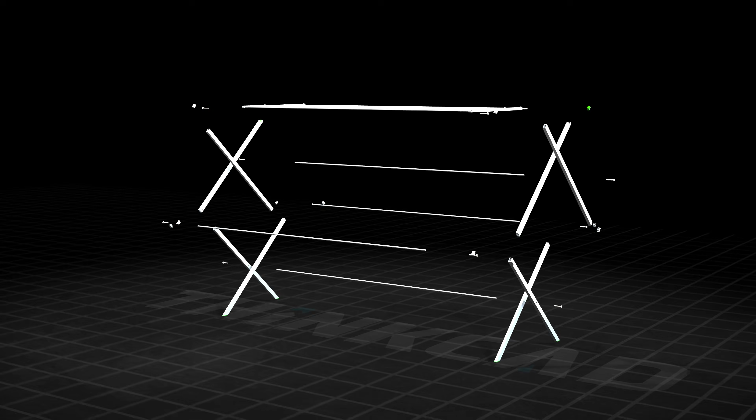Have you ever had an idea and wanted to make it real? In this video, I'm taking this rack, break it down, design it part by part, and turn each part into a technical drawing that any mechanical engineer can manufacture.

Throughout this video, I will be talking about the reasons behind my choice of feature and choice of technique, why I use a feature the way I do it, why I design a part the way I do it. I want to prepare you to start learning a little bit about DFM, Design for Manufacturing. So it's not gonna be your typical SolidWorks video where I say, go to this menu and click here.

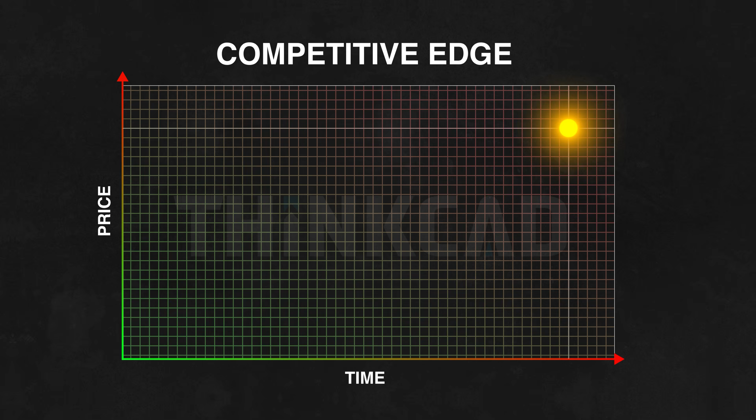You'd want to reduce cost and shorten lead time to stay competitive, because the cheaper your product, the stronger your competitive edge. The way I'm planning to do that is by going after standard components, basically off-the-shelf parts, something I can buy from a website, a production line, or a manufacturer that can already provide it.

So instead of extruding a rectangle, I will go here and I would draw a line. Now I would go to members inside the weldment tab, and I would use the 0.63 by 0.38, which gives me the profile I want. That's an off-the-shelf product, and I don't need to make sure if this component exists or look for someone that can manufacture this. So first step, I would need 3 holes on this member.

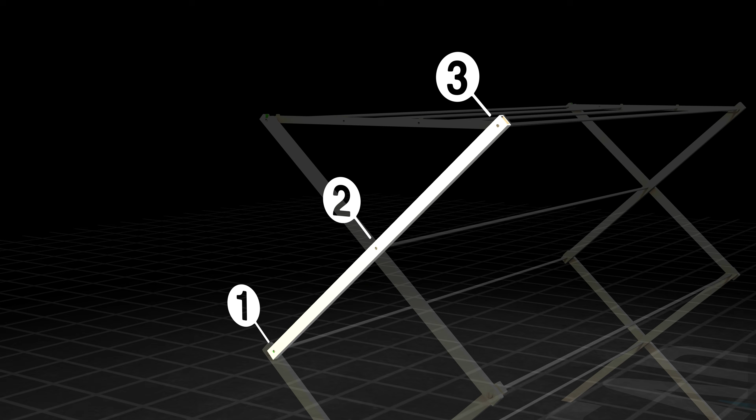Each of these holes has a function. They act as a hinge once the part is duplicated and connected to each other. I also need to consider their size and location. Obviously, it hinges on both ends and also at the center here. But what's the actual size of the hole? What passes through them? How big should they be? These are the things I'm considering at this point.

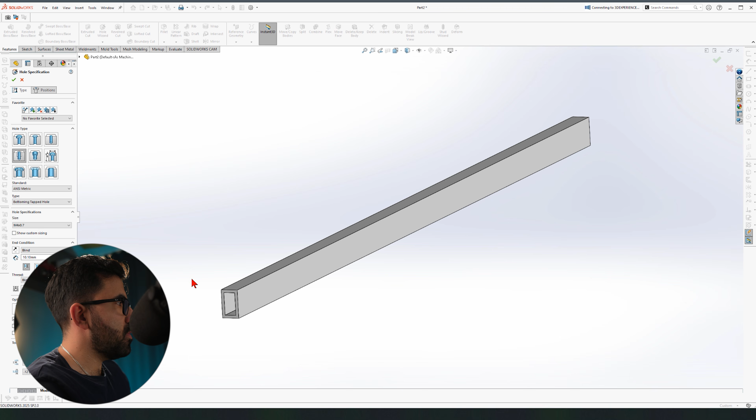So next, I'm going to create 3 holes here. I will use Hole Wizard, and these holes should be large enough to accommodate an M4 screw. I will tell you why. Since I'm going to have the M4s move around in it rather easily, I need to activate the custom sizing and change that to 4.1. Now I can save this.

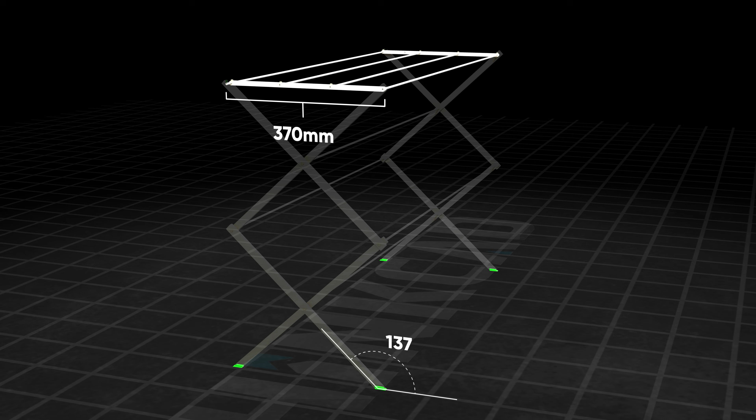Now at this point, several variables are still unknown to us, such as the size of the top rack or the angle of the feet. For example, if I wanted the final rack to stand at this height, the top rack would shrink and the feet angle would be angle X. But if I wanted it shorter or with a larger top area, I'd have to reduce the height, which would also change the cut angle of the feet member. So at this point, I'd prefer to already start my assembly so I can better visualize the issue.

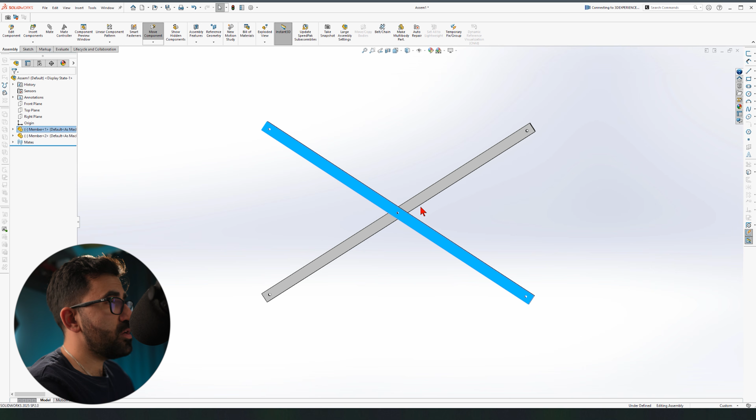Now I need to go and create my mechanism, which is the accordion effect. Now I need 2 of these, so let's duplicate one by holding the control key on the keyboard and dragging one here. If I put this circle on this one and make them coincident, I kind of create that mechanism. But the first component you insert inside the assembly in SolidWorks will be fixed. Now I could right click here and have it float, but then it would be absolutely free with all the degrees of freedom inside this space, which is not what I want.

So what I want is for them to be in one place and work symmetric. Therefore, I'm going to use the top plane and have it mated with this surface, so at least I prevent them from going back and forth along the y-axis. If you look at it, I cannot go back and forth, only up and down. But now I'm going to have to kill that too.

So let's find the plane, this one, and let's have the axis shown. So this tiny axis here, I'm going to pick it, hold the control key down, and mate it with this one. If I do that, then it would move here, but it would probably only go up and down, which is the last thing I'm gonna have to fix.

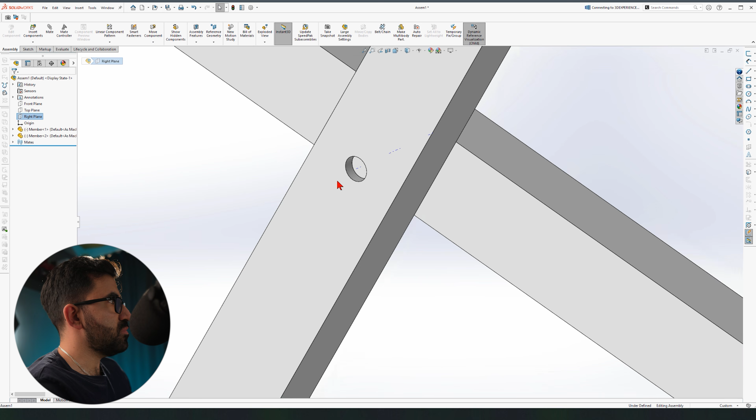So I would probably hold this one and this one too and make them coincident, but they are not moving symmetrically. That's not what I want. I want them to move symmetric according to this plane. So I would select that plane, go to mate, go to advanced mate, pick symmetric, and let's pick this and this. Now, I think we're set.

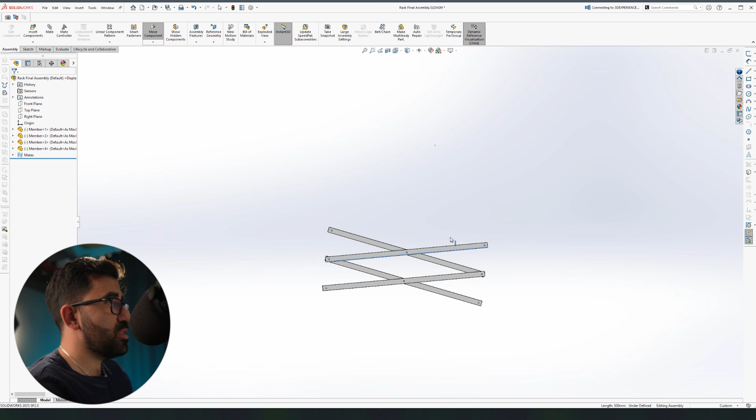This is the accordion effect that we wanted. However, I need another set of these, so I can just duplicate this up. And if I put this one on this one, I have taken care of the first set of my members. That fast and that easy. Done. Now, the next part I want to work on are the shafts that connect these together.

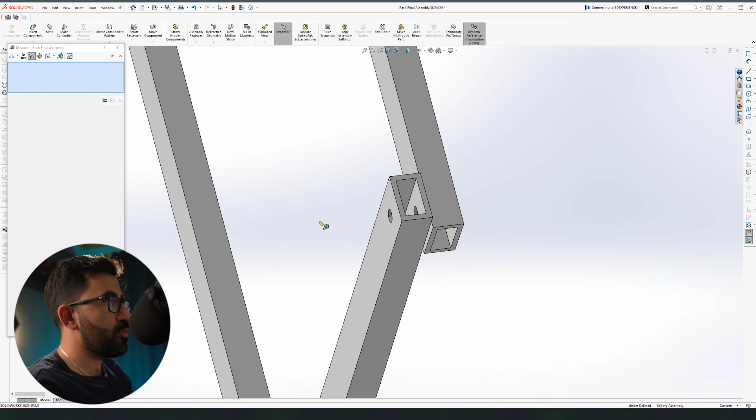So I need another set of members on the other side, but in between, I'm going to have to create shafts. So over here, I have created the holes with a diameter of 4.1 millimeter. Now, the shaft ideally has to go through this. So if the shaft is 4 millimeter, it's fine. I could do that, and in fact, I will do that quickly for you just before I change it and tell you why I cannot do that.

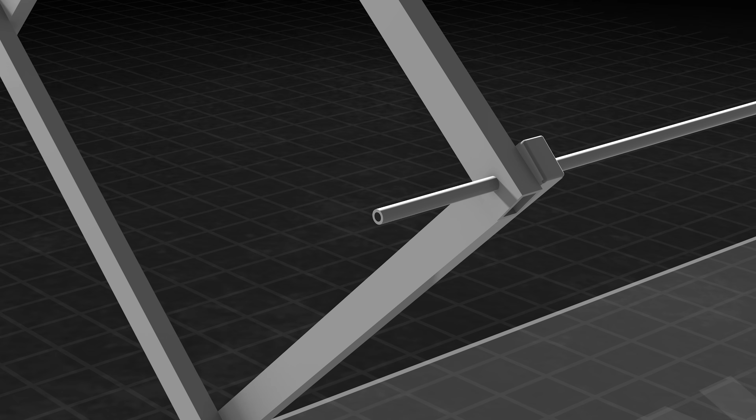So first thing first, if I wanted to create a shaft with a diameter of 4 and wall thickness of 1, this is a shaft that we probably can find in the market. It's standard size, but if I do it like this and say, okay, you two stay here, it would look okay, right? There is a hinge, the shaft goes here, but what would stop this member and this member from moving to the right? There is no shoulder here, there is no stop here, so there is nothing preventing this. Even if we screw something at the end, we would just prevent it from going outside, not inward.

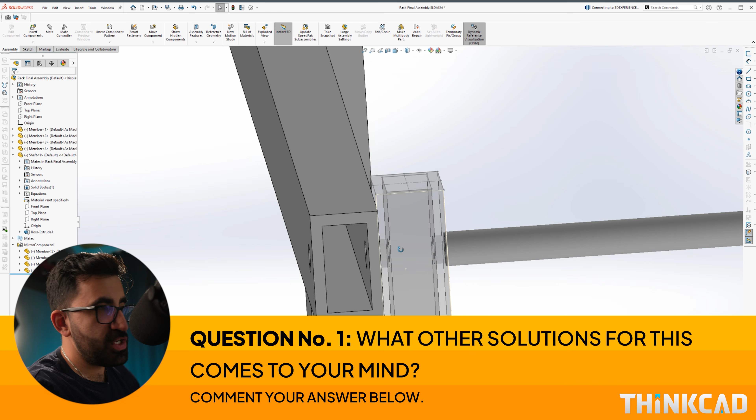Therefore, instead, have this one fixed here, and the diameter should also be bigger. So because the hole is 4.1, I want to look for a shaft which is maybe 5. Why? Because I want it to be larger than the hole that I have. So the shaft is now acting both as a shoulder and the shaft at the same time. But how do I connect this shaft to this side?

I just go here and go for the most common standard mechanical component, a bolt. We put a bolt here, which is M4 on default. We just increase its length to 25, so it can go inside the shaft. And we click OK. But if I do this, I would run the risk of tightening this screw too tight, so this member and this member won't be able to move easily anymore. If you assemble this and make it too tight, you lock your mechanism. So how do I prevent that?

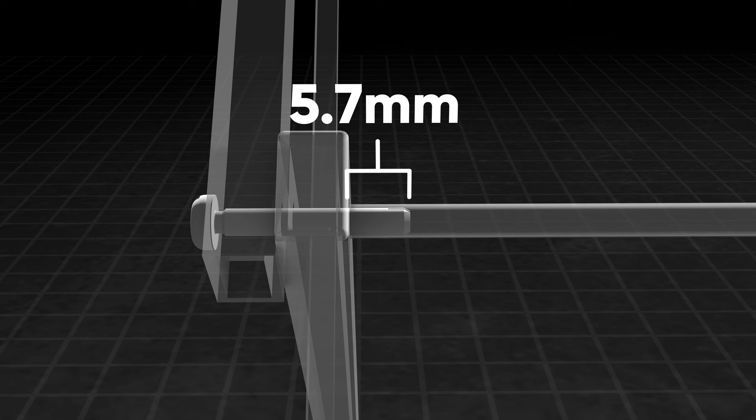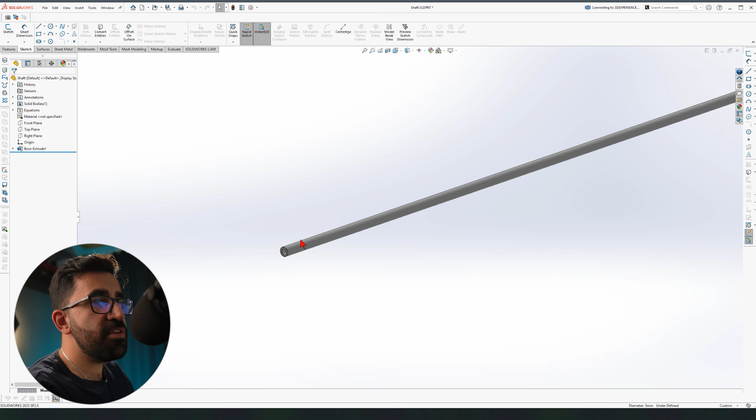So I would come here and insert an inner thread inside this shaft, and I will calculate the depth of this inner thread. By the time the screw is inside the shaft all the way, I will leave a 0.2 millimeter gap here, so there is no locking. But how do I do this? First thing first, I would hide one of the members and I would just measure the depth from this surface all the way to the bottom of the screw, which is 5.7. So if I add an inner thread inside my shaft, which is only 5.5 millimeter in depth, then I think I have created that gap that I wanted.

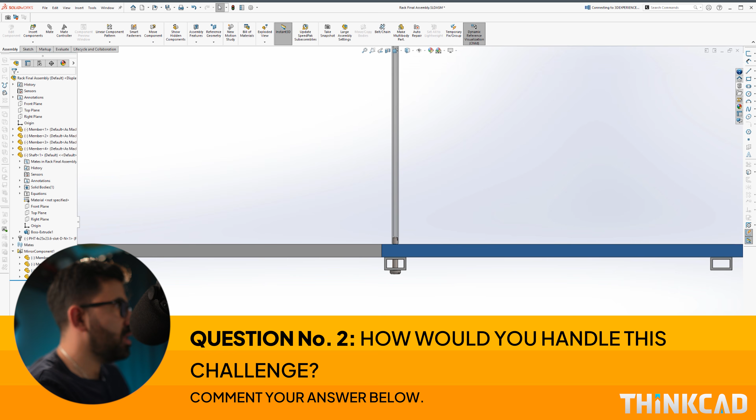But since this is only for the drawing, I would add the cosmetic thread. So we go here and find the M4, not up to next, 5.5. So let's go back and show the mates that hold the screw in place. Let's remove that so we can move this out. We said we want this surface to this surface to be at a distance of 5.5 millimeters. And when I do that, I would hope to leave a gap of 0.2 millimeters here, which I am seeing successfully. Where is it? Over here. This is the gap. Let's calculate it one more time. It should be 0.2.

It is 0.2, so if I tighten the screw too hard, I still wouldn't lock my mechanism. That's another thing to consider. Now my screw also works as a hinge, but the other problem is the shaft is extruded blindly. I cannot take advantage of having a mid plane here to mirror these members to the other side. There is no mid plane here.

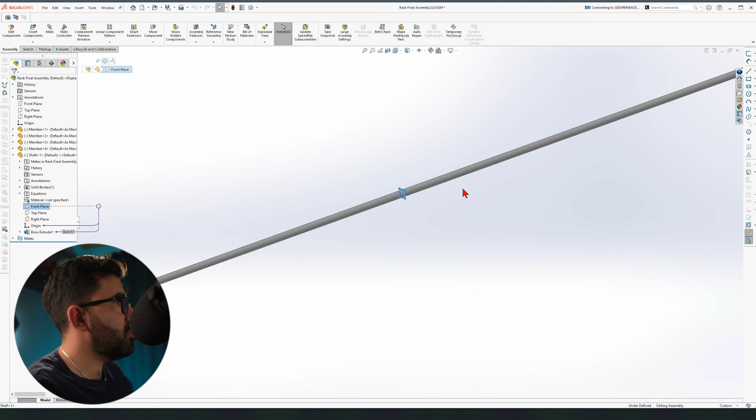That's why I would go back and edit the way I extruded this feature, changing it to mid plane. Always do mid plane, guys. If you're starting off with SolidWorks, if you're a fresh engineer, SolidWorks helps you. Go with mid plane, that's my recommendation. Because if I go with mid plane and open my shaft, I'll see the front plane is here, and I can use this front plane to mirror all these components to the other side. Done. If I did it the way I did it the first time, I could not have done this.

Then I would have had to go create a custom plane, and you don't want to do that. Instead, what you really want is to let these modeling habits sink into your head until they become second nature. It's not about memorizing tools or tricks, it's about building a way of thinking, so when you're in front of SolidWorks, things just flow.

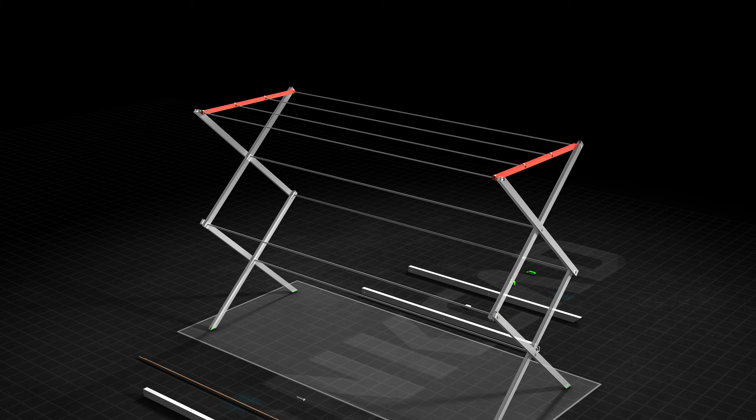Since this is a symmetric design, all I have to do is mirror some of the components—some of the shafts—from one side to the other. And by some of, I mean one. This is the top rack, which we have to introduce here. On one side, it has to go inside these two holes and act as a hinge. On the other side, it has to be folded and also sit on top here and get locked.

So how do I do this? First, let's measure the rough distance between this hole and this one at this stage. This is about 339, so let's go for 350, okay?

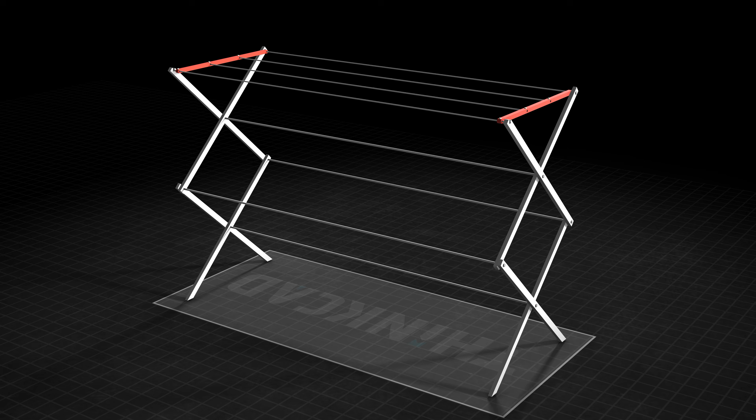But since we need a set of components assembled together to work as a group inside the main assembly, we first need to create a sub-assembly for the top rack parts. That way, we can bring everything pre-assembled into the main assembly. The first component is drawn, then extruded.

Then the circles are added. Now the question is, do we want each hole large enough to fully accommodate the shafts, or do we want the holes smaller like the members, so the shafts rest on the inner surface?

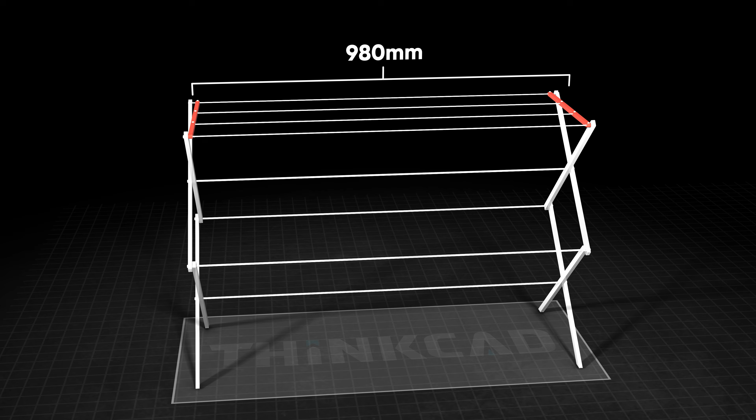To answer this, we look at the rack assembly from the top. If this sub-assembly sits between the inner members, then this distance equals the shaft length. But if it sits between the outer members, that would be a different length. We choose the inner one. That means our side components must sit on the inside, so the shafts must fit inside these components. Therefore, the diameters need to be slightly larger than 5 millimeters, say 5.1, to accommodate the shafts.

So now let's design this side component. At this point, I'm going to create a sub-assembly. Starting with the first side component, I draw a center slot. This center slot will accommodate, let's say, 3 to 4 shafts. So I have the length, and I draw a circle to accommodate the shaft on one end.

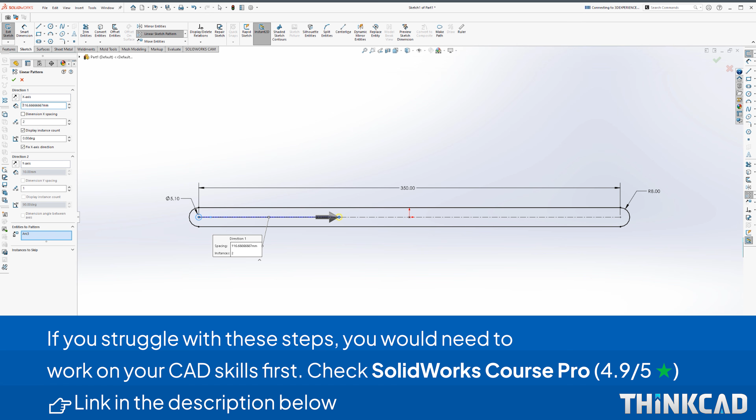Since the shaft is 5 millimeters in diameter and we want to fit it inside this, 5.1, let's use linear pattern to create 4 of them, dragging the last circle to the last point to make it fully defined. Now I can just go ahead and extrude this, let's say for 10—mid plane is fine.

I now create the first assembly, a new one, because I'm going to use this assembly as a sub-assembly in the main one. So I just bring the shaft and fix it inside here. Done. Now I need 4 more.

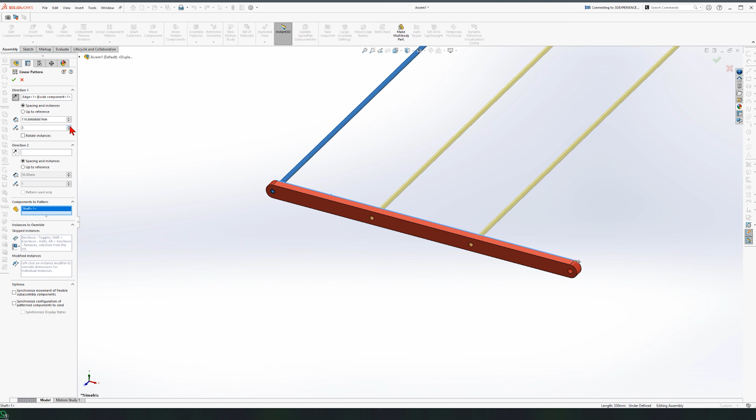I can use linear pattern in assembly mode, picking the shaft along this X, dividing by 3 gives me the right value. Yep. I would need 3 because the last one is an exception—I'll tell you why in a second. So let's just go ahead, open the shaft, use the front plane, and mirror this side component.

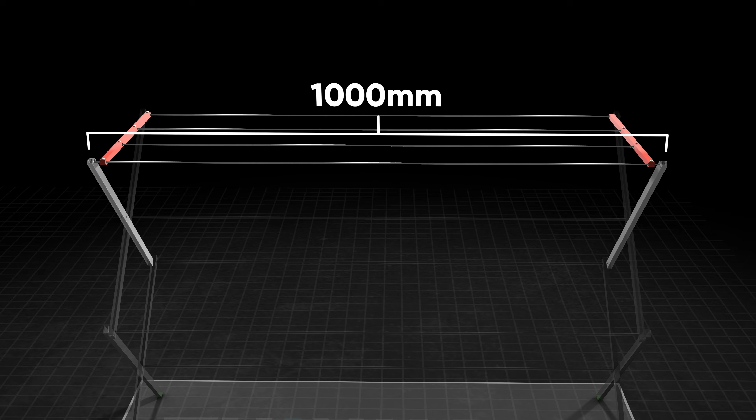But at this point, we face a new challenge. The rack has an inner member on one side and an outer member on the other side. The distance on the side of the sub-assembly is designed for the inner member. So on this side, we would need a longer shaft to extend down and lock into both members. But that would create another challenge of its own.

For now, we start by creating a new configuration for an extended shaft. Therefore, bring the main shaft here. Now, the extended shaft is here. Width is the type of mate I need.

So these two ends are on the red components. Now I pick the ends on the extended shaft, this end and this end. That looks good. And I can save this sub-assembly in order to bring it into the main assembly.

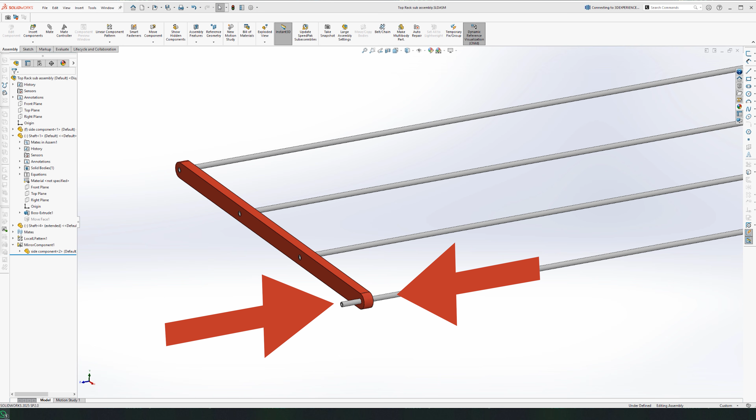Now, in order to make sure the side components don't move right or left, basically to ensure everything you see right now is fixed together, we need a mechanism to hold the shafts and the side components tight. I'm thinking of adding 4 holes on each side component and using M3 countersunk screws. That way, the screws sit flush and connect the shafts to the side components. Using only 8 screws, we could achieve this.

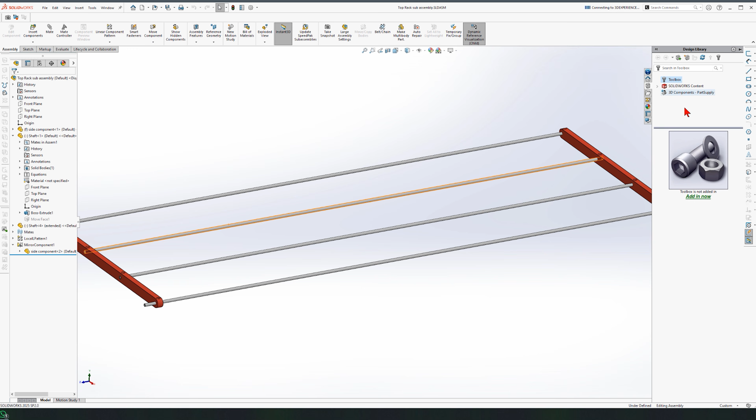Placing the screws is easy. If I change the view to wireframe, I can see the holes and place my real holes directly in the center. This could also be done by measuring and adding dimensions. Then I'd use the library tools to bring the screws. Choose countersunk M3, adjust their length, and add 8 of them into the sub-assembly before bringing it into the final assembly.

But this is a design intent question. You have to assume that once the rack is empty, it's one situation, but once you put wet cloth on it, applying weight, you're pushing it down. Now, if I lock the upper top rack from the top while pushing it down, it actually becomes self-locking. The more weight applied, the more secure it gets. That's because the force presses it tighter into place.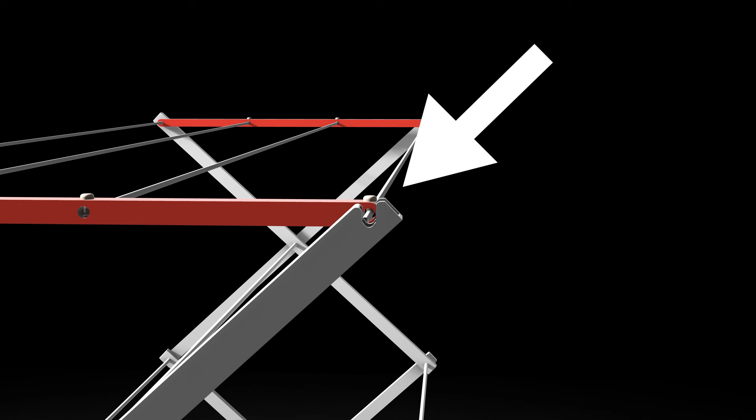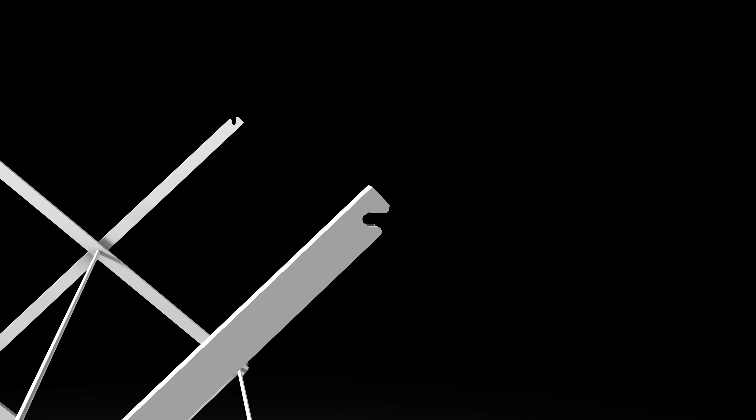But if I lock it from the bottom, then nothing prevents it from shifting left or right, and the entire structure could collapse under load on the other side. That's not what we want. So a good design should lock from the top. If I go from the top, I need to consider the next steps carefully. Or if I go from the bottom, I risk instability.

Therefore, in order to open some entrance for this shaft on this member, I need to first consider one thing. If I change this member here, I'll be changing all the other members. And since I don't want that, I'm going to have to go to my member and create a new configuration for it. That would allow me to create an exception for this member.

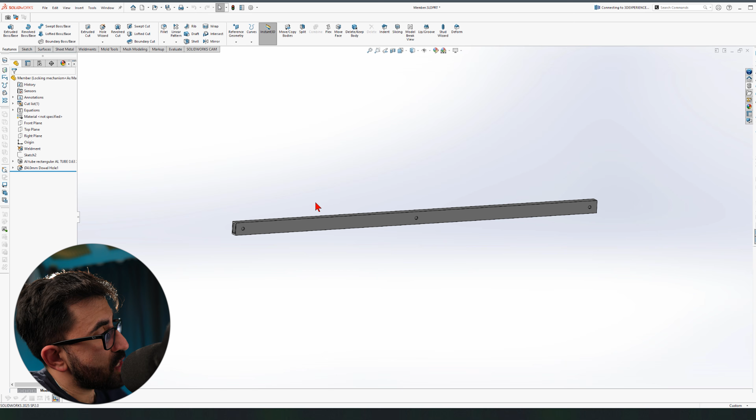So if I go to the configuration manager, right click and add a configuration, and add locking mechanism. Then I get to go back here and apply whatever I want to do to this design tree, and it would just change one of the configurations. So how do I do this?

First, do I open a gap here, here, here? How do I do this? I know it's hinging around this axis. So in order to do that, I'm going to first go here in the assembly mode, click on the member I want to change, click here and go edit part. Now I want to edit this part, right? And I know for a fact I want to draw on this surface.

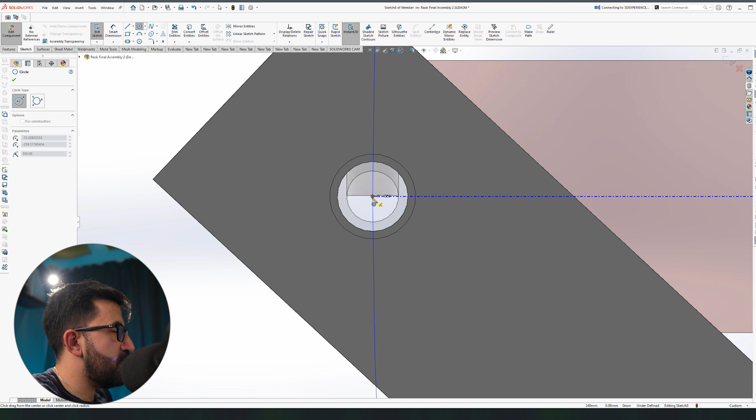Okay, what do I want to draw? I want to draw a circle that starts from this opposing axis here. It's concentric to that, and it goes all the way to the center of the other circle. So this line is the path where this longer shaft on the top rack part moves along.

So if I want to create an opening, I need to just open it from here to here. So let's just go to offset. The shaft is 5, so if I offset this line for 3, just to give it some space, because offsetting it in 2 directions. I'm offsetting it bidirectional and changing this line to base geometry. That's what I mean.

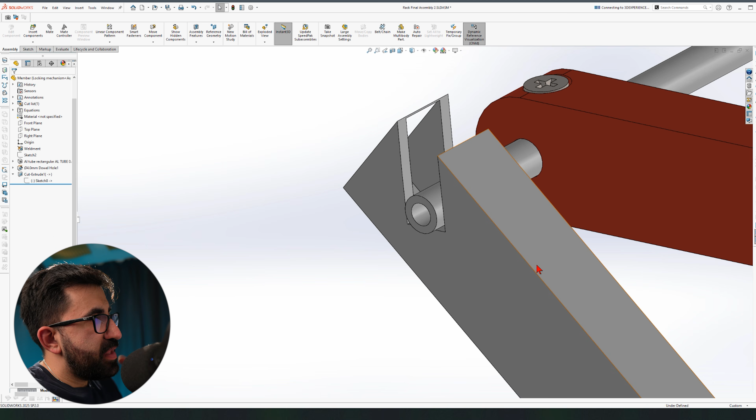Very well, theoretically it looks good. I still have to deal with a lot of issues with the mate. Probably the last concentric is the issue, I'm gonna delete it, it's fine. At the very least, when I put some weight on the top rack, it's not gonna fall down.

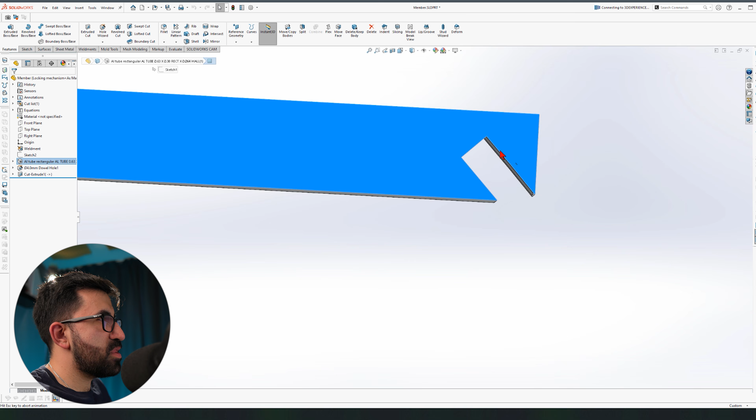But cutting a component like this with having such a narrow component there, it's not reasonable nor wise. So we're gonna have to change our cut a little bit. I can just add some new feature to it for the ease of use. For example, I can just get rid of this top half.

It works, but having sharp edges like this for an end customer product is not something I would recommend. What do I recommend? Rounding this. I could just round this. This is too big, maybe with one.

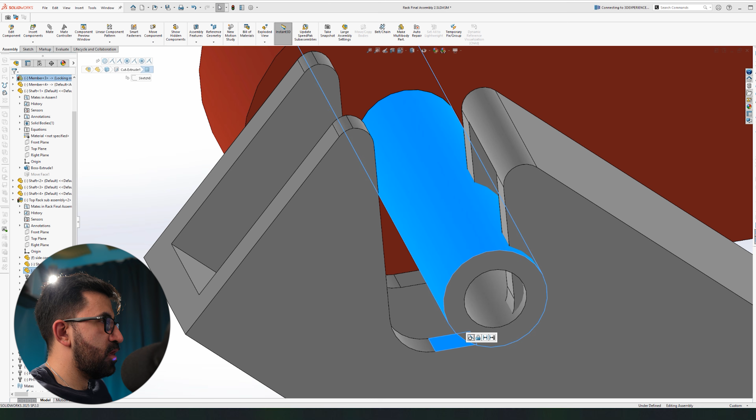Okay, looks a lot nicer. However, this thing is not in the right place. So let's have this one tangential to here for the locking mechanism. And boom, something like that.

All right, next, I need to answer a few questions myself. Is it ready? No, I don't think so. Why? All these ends are open, so we need to close them with caps. It just has to be a small, simple, normal cap, nothing too fancy, so let's see what we find out.

Like this, now the cap is added. Let's change the transparency. Is this cap interfering with this bolt? No, it's not, so we can leave it at that. And let's add all the caps.

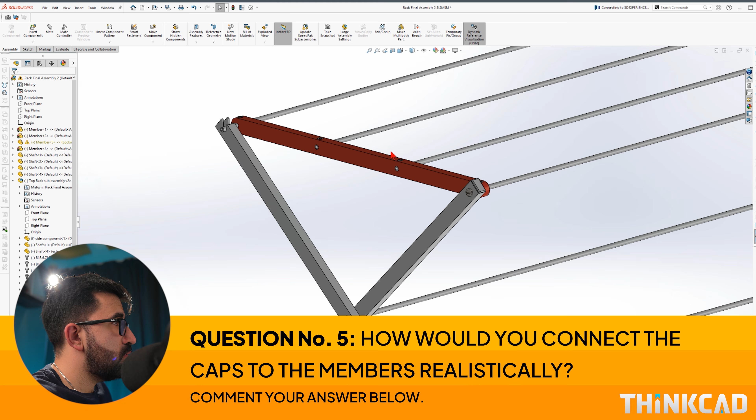Oh, this one needs a special cap, so let's remove this one. And that one needs a special cap too. I will tell you why in a second. So let's just add all the caps.

Okay, so to this point, everything is fine. It would hinge here and it would make sense. It would come down here. And the more we put pressure on it, this wall on the back here would prevent this from collapsing.

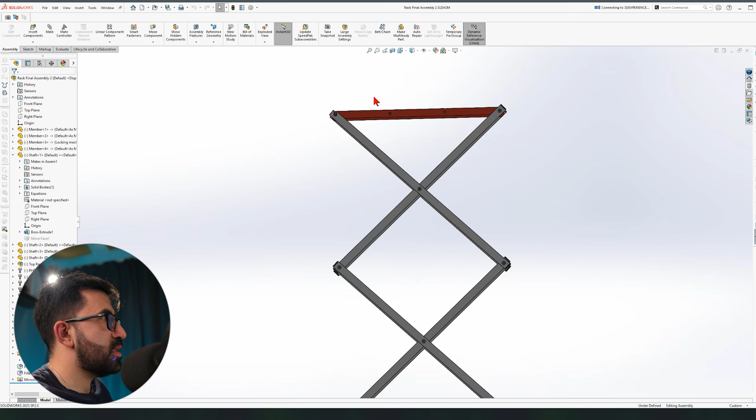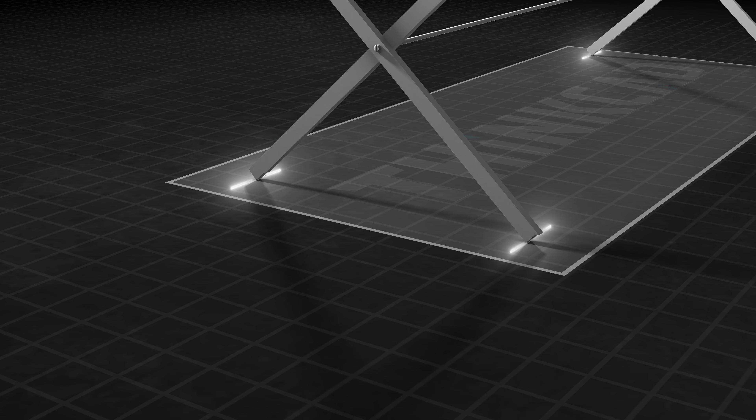So now I need to take something else into account. When this is closed like that, when we put too much weight, it tries to collapse and it would stop here, right? And at this point, I need to ask myself, do I want my rack to be sitting on these four small lines, or do I want a flat surface? For stability, I would prefer a flat surface.

But like the top member here, which was an exception, if I change the bottom one, I'll be needing to create a new configuration once more. So let's do that. Let's go to this member and create a new configuration, and let's call it the foot.

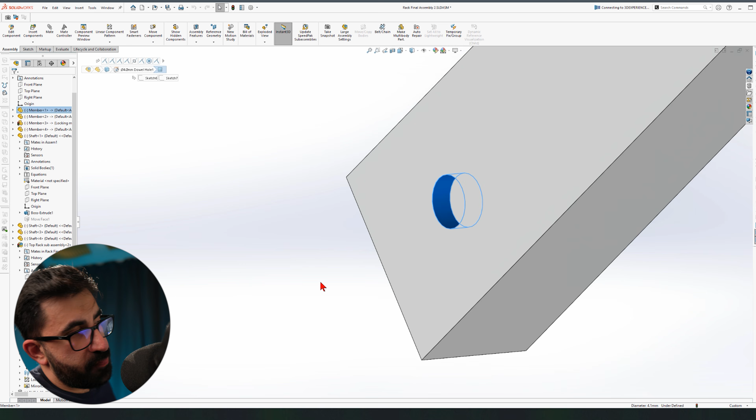Now we are on the foot configuration and I need to know which side to cut. And since I don't know if I make any changes, it would apply to this end or to this end, I have already changed the color of one side here. So I know I need to be changing the side that is blue, not this end, but this end where we have the blue.

But if I create a new drawing, I don't know, do I cut it at this angle, this angle, this angle? I don't know anything. What do I do to find it? I use the assembly to find this information.

I edit this part, edit the part. Now, new drawing. I know for a fact this would sit here, like if this was our ground, this is the angle I cut. But then we have a hole here, which is ugly.

Do I want to cut a little bit above it, making everything shorter? Sure, why not, let's do that. Get rid of this and have this one tangential to the circle. And we want to have the ground.

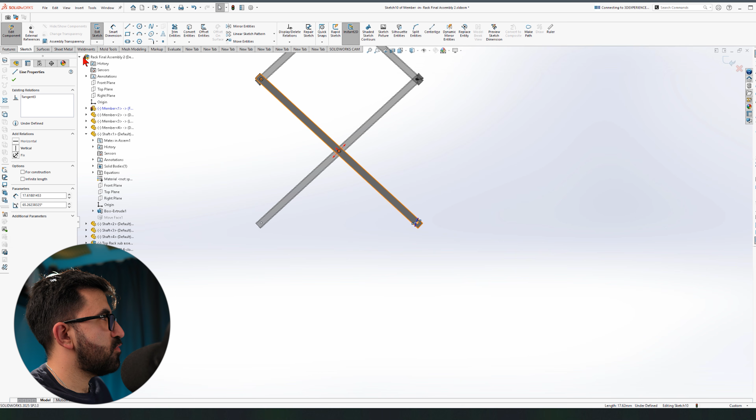And since I don't have any reference for it except the front plane, let's have these two parallel with each other. Now, all I have to do is to close this sketch and cut through it. But look what happened on the other side. Doesn't matter, we dealt with this before.

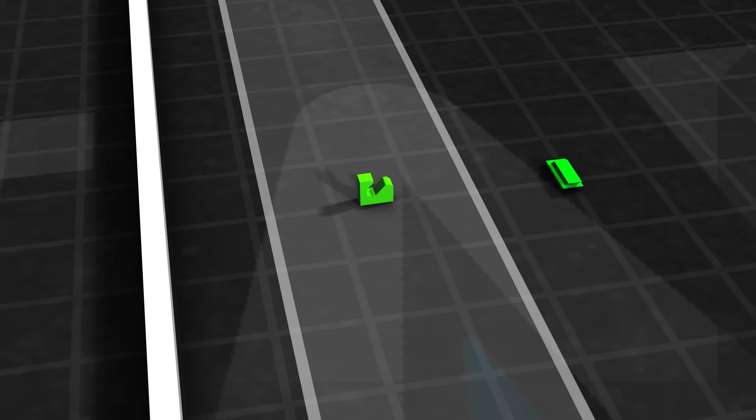I think we got it. All I have to do is to go to shaft, mirror these two, and see if I see any errors. No errors, that's good. Now let's add that weird cap inside, the way I do it.

Okay, I would do it like this, but if I go back, we have some issues because now they are one single component. What I would like to do is to get rid of this first, save it, and then try to open this component, which is the member.

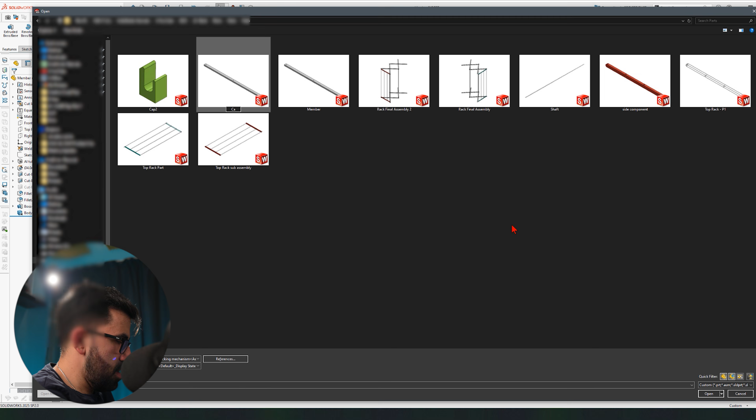Let's duplicate it here and call it cap 3, and then open cap 3, then reverse the delete component, and then click OK. So now, or change the color. Now here I can just bring cap 3, and I know for a fact that it fits. If I go like that, it would definitely fit.

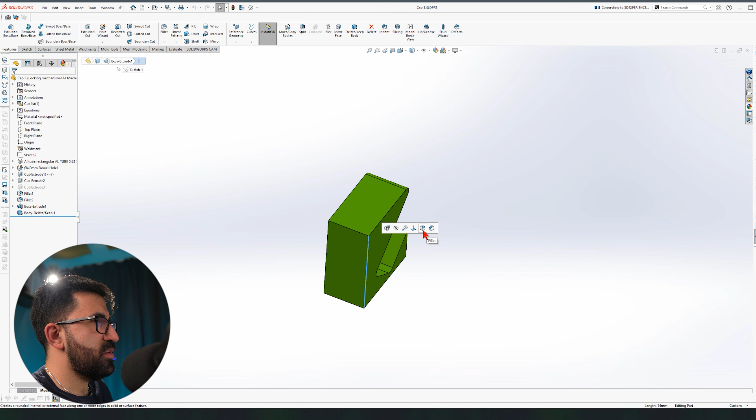Like that. And then we have to take care of how we're gonna connect these two together and what this component is actually made of. Is it 3D printed? Is it injection molded? What is it? Probably best would be to maybe even have it hollowed. However, since I don't know any of this right now, I'm gonna leave it at that. And then we can glue it there.

Now we can use the front plane on the shaft. Look how beneficial it is, how many times I have benefited from this throughout this project. Boom. The last thing we want to do is to add another cap on the bottom if we want to make sure it is sitting perfectly on the floor, and move on to the drawing. So let's do that quickly.

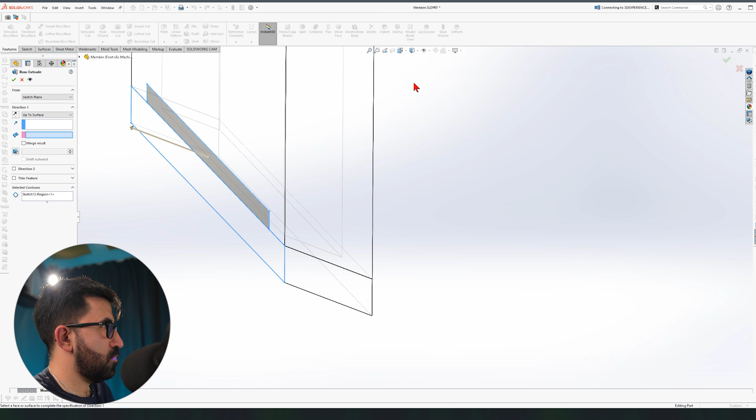Now we can bring the cap foot too, and we know for a fact they would fit perfectly like this. Again, mirror. Look how beneficial it is to extrude things mid-plane. Okay, I think it's done.

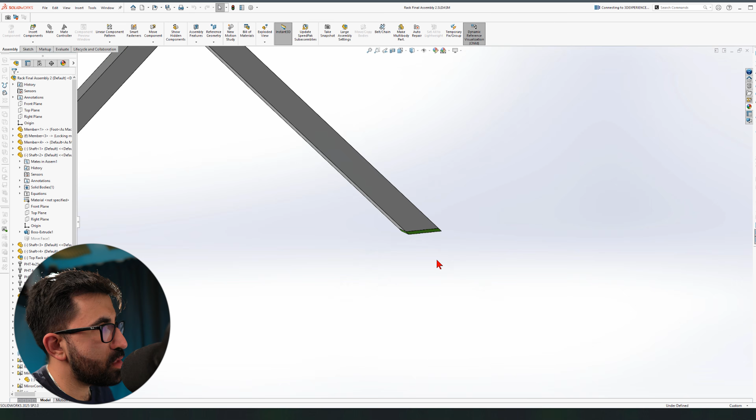And we need to also take into account how to connect these caps, this and this particularly, to the members. Is it glued? Is it welded? Is it screwed? We need to do that. Now, let's move on to making the drawing for it. The sheet format is not scaled correctly, so let's go 1 to 5.

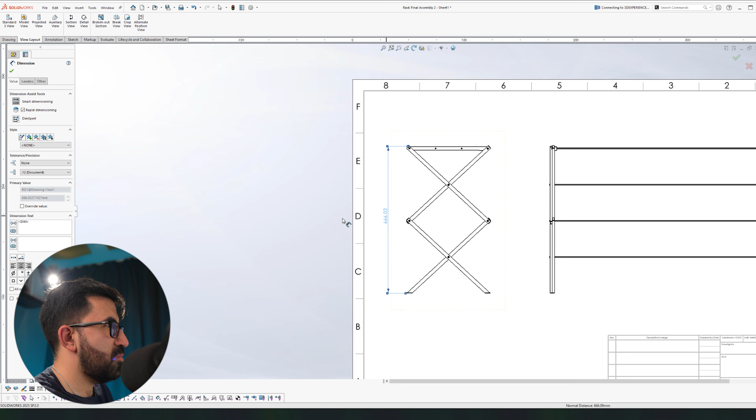I think it's good. Now, at least we can see the final dimensions on the fully assembled rack. Oh, 666. What are the odds? Good. The height is almost good, like a cabinet, including the bolts. We have bolt to bolt, 1 meter. It's 66 centimeters tall, 37 wide, and about 1 meter long.

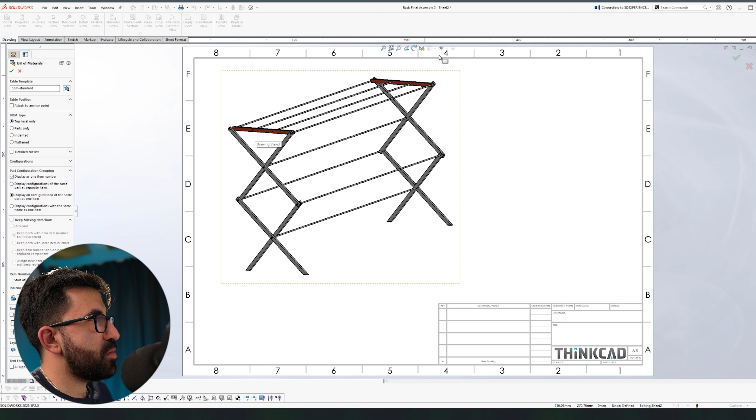Now we want to create the bill of materials as well as the individual drawing of each component. We could add a new sheet here, bring the current view like that, and create a bill of materials. So insert, tables, and bill of materials. Top level only or parts only. Let's go with parts only, because if I go top level, this whole sub-assembly we have created will be counted as one component. So instead I go with parts only, and I get 8 different components.

Now, I don't know what's what, so we can go to annotations, use auto balloon to assign numbers to this drawing, so we know what's what. Do we have 1 through 8? 1, 2, 3, 4 is missing. What is 4? The view is not helping us to see 4. 5, 6, 7 is missing too. What is 7? Cap 3, which is there, right?

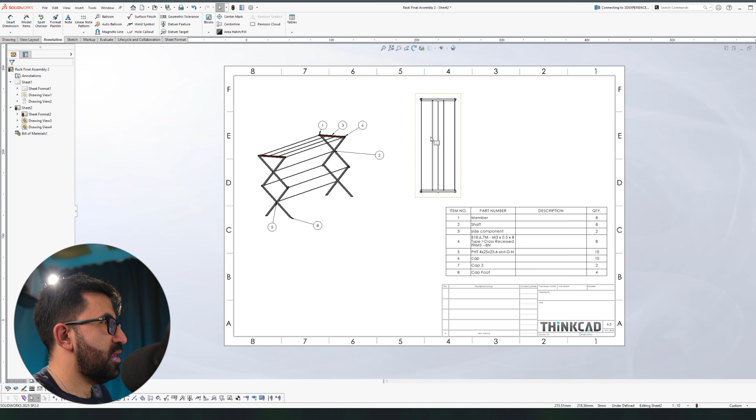So what I do is I would add another view up here. Since now the scale is too much, I'm gonna have to change the scale on sheet number 2 to 1 to 10, so we have more space to work. These are on magnetic lines, so I can just move the magnetic line. They follow order. Good. And now we said number 4, which is the pin. So let's create a detail view from this side that covers both number 4 and number 7.

Now I can bring detail A closer, bring it down here, select detail A, then auto balloon. So we get number 4 and number 7 on the detail view, a lot cleaner, and we know what's what. And since it's not clear, I might consider changing that into a color view, so whoever is viewing this knows what's what. At this point, we can go ahead and create individual drawings for each of these components.

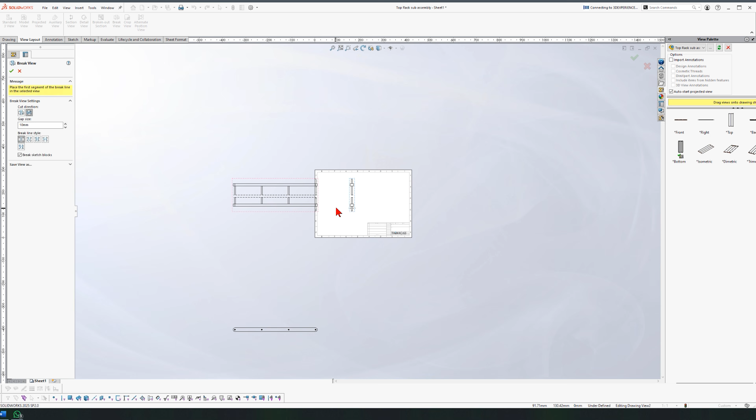Okay, so let's start by creating the drawing for the top rack sub-assembly. I would like to increase the scale because these components are small, but if I do that, the whole component would not fit into the sheet. So I would use the break view to make it smaller. This way, everything fits onto the sheet and I get to see all those small features clearly. Because if I reduce the scale until it fits, I could not see the components in the bill of materials. Speaking of which, let's add that over here.

Now we need to add some numbered balloons to each component so we can associate those components with the bill of materials. This way we can distinguish them clearly in the bill of materials like this. Now let's add some dimensions.

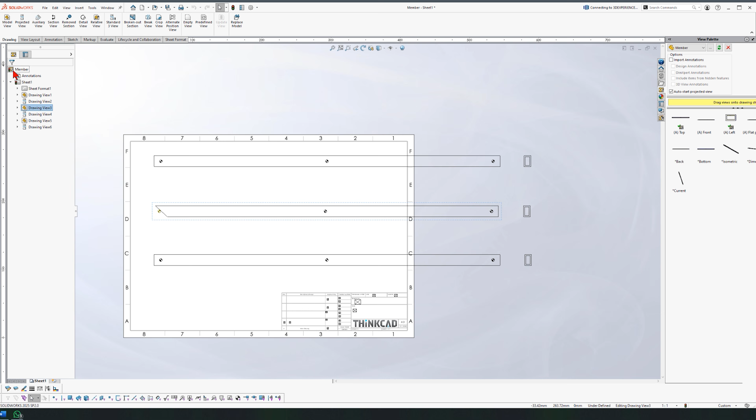And this is done. Next, I would like to create a drawing for my members. Since I have 3 different versions and they are almost similar, I would like to include all 3 in one drawing. You could have them individually, but in this case, since it's not for batch production and more of a one-off project, I will include all 3 similar components in one drawing.

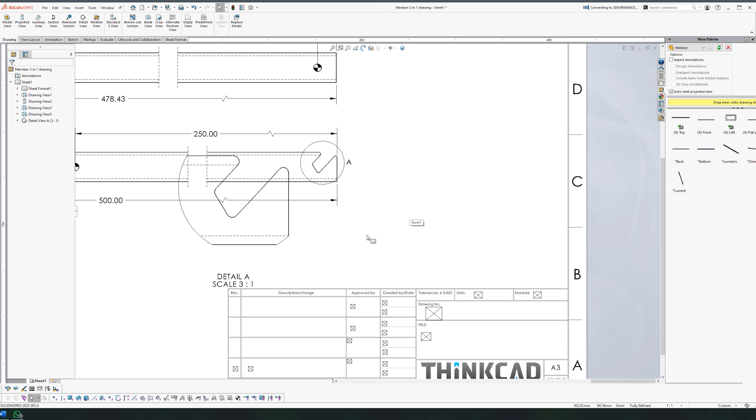Adding the dimensions is also easy. But every time I see a dimension that has decimals, like tenth or hundredth of a millimeter, I should ask myself, does a rack need to be so accurate down to 10 microns or even 100 microns? No, it doesn't. So I will just reduce the decimals to 0 to stay clear of that and reduce manufacturing costs. Because if you want to manufacture it down to the second decimal, it would increase the cost significantly.

Also, here on this opening, this was made by a circle, so it has a radius, but it doesn't need to be that way. If it's a short straight line, it still works. So I would use a center line to be able to use an angle instead. And just like the dimensions, the angles don't need decimals. 42.4 degrees is overkill. It would increase the cost, if not make it impossible. I could reduce all of that and make sure there are no decimals here.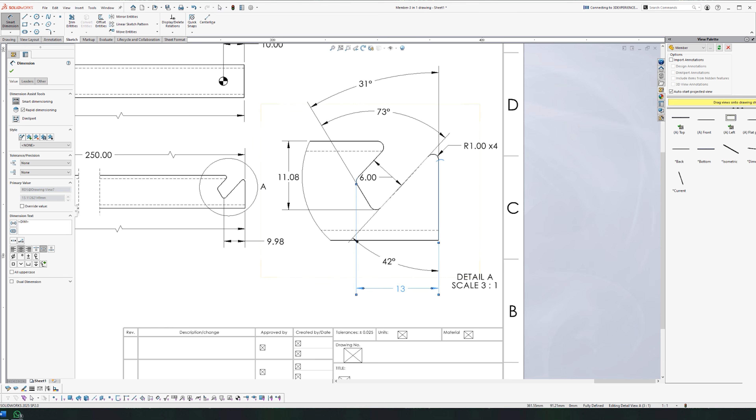But for a drawing like this, since I didn't draw it in the beginning this way, I would like to run a test. I usually take the dimensions I have, screenshot the drawing, and try to recreate it based on the way I dimensioned it. This way I can check that it's not overdefined or impossible to manufacture. That's what I would do here. And it seems to me that it's working. So it's acceptable. We save it and move on.

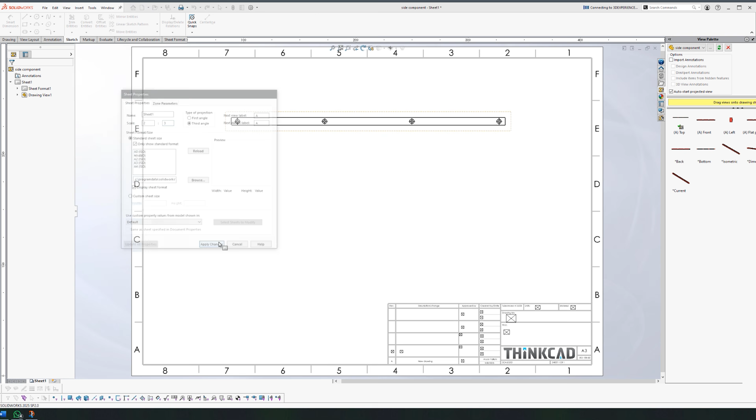Next, I would like to start with the side component. Let's bring it here, fix the scale, and create a cross-section view. As I was adding the dimensions, I realized this is a very solid and thick material. It's not necessary. Why waste so much raw material when we could remove some to make it lighter and cheaper? But for now, I'll just add the essential dimensions before making any changes.

This is a hole callout. This is the thickness. We need to add tolerances to make sure the shaft will fit here. Usually in assemblies, I cross-check every component against the counterpart later, after I'm done with the drawing. This is just preliminary, but you need to do that too, because shafts are going to go inside these openings.

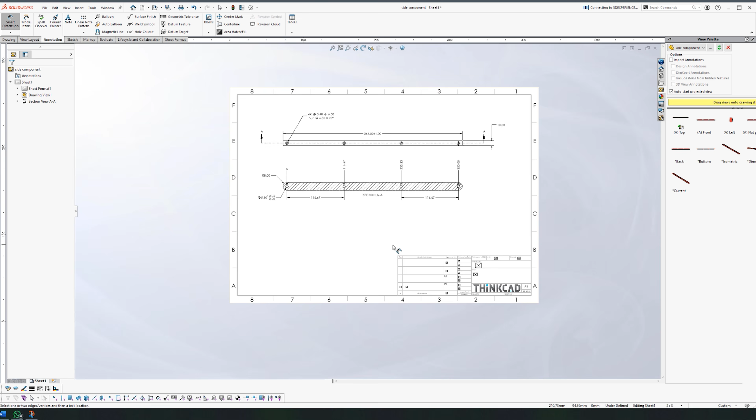I would save this, but at this point I like to create some cavities. Since this is a solid material and changing one side would potentially change the wrong side in the assembly, I'll change the color of the outer side so I know what's inside versus outside. That way when I edit, I work on the interior and not the exterior. Now, shelling would not be practical here because of the M3 countersunk holes that would make manufacturing this component impossible.

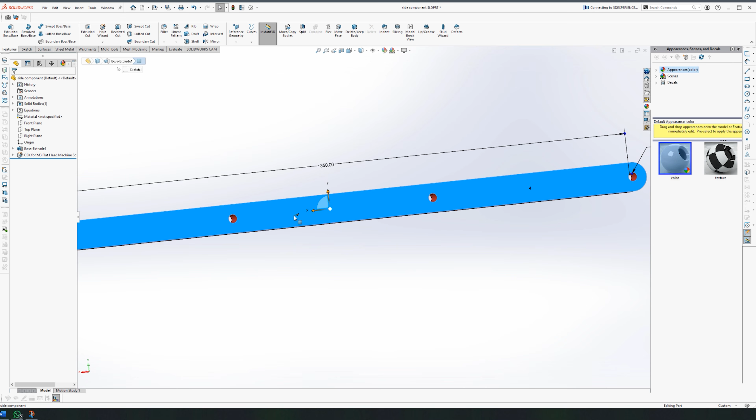I did the same thing, asked if it was possible for injection molding. I didn't like the answer, so I'm changing the approach and making it simpler. Instead of using shell, I'm using a boundary down with an offset from all edges, then extrude cut straight down. This way, the tunnels connecting the M3 countersunk holes won't be an issue. The draft analysis looks okay.

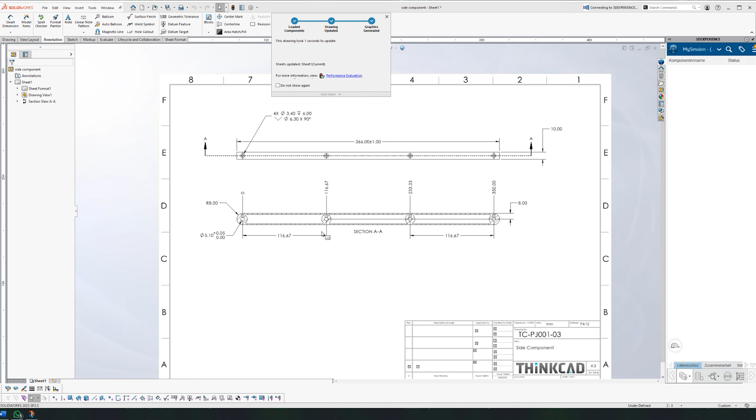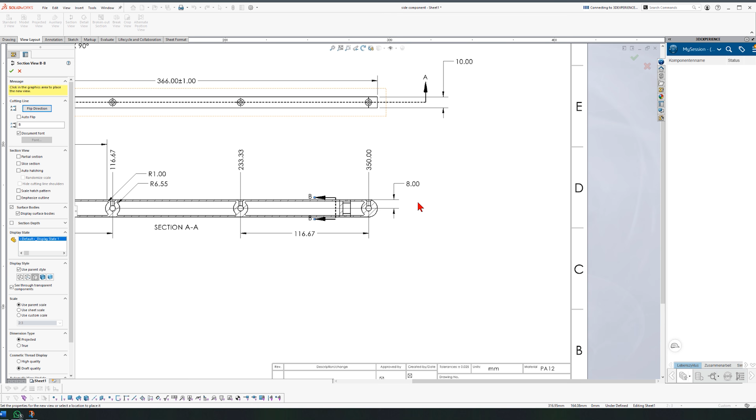Looks good. Back to drawing. We need to update the height or the depth of this cut and add a couple of radiuses. This radius and this one, plus the wall thickness. 1.45 should be fine. Not too thin. We could make it thicker after talking to the manufacturer later, but for now I'll roll with that. I'll define the depth of the cut through another cross-sectional view. Section BB from here to here is 7.

Right now, this drawing looks much better. Just like before, we don't need decimals. I'll remove them, keeping only 1 decimal where necessary, or none at all. 2 decimals is too much and makes the part unnecessarily expensive. The draft angle analysis looks okay. Even in the assembly, it looks perfect. At least we've removed 40 to 50% of the mass.

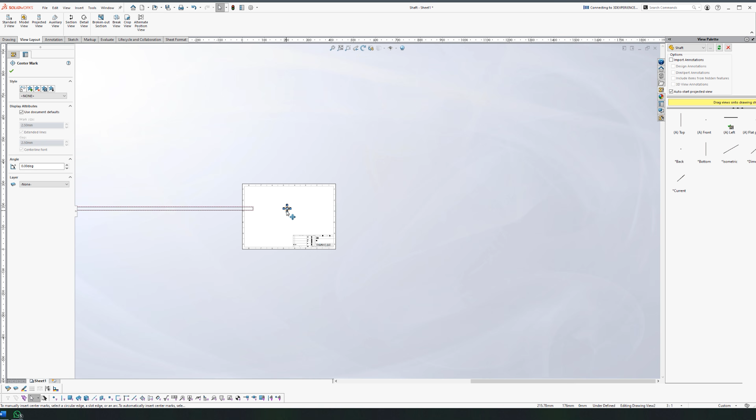Next, we have the shaft drawing. There are 2 configurations, normal size and extended size. Let's fix the scale of the sheet. Again, I'll go larger so I can see the diameter sideways, then larger again, and break the view so the whole component fits. If you feel like it's too short, you can drag the break line to make it longer, but I think it's okay.

I activate the hidden lines. The depth was 5.5 if you recall, so this is the total length with the tolerances for the outer diameter, so the manufacturer knows what's acceptable. I define the tolerances for the length, let's say ±1. We're flexible enough, we could even go to 2, and I don't think that would cause any problems.

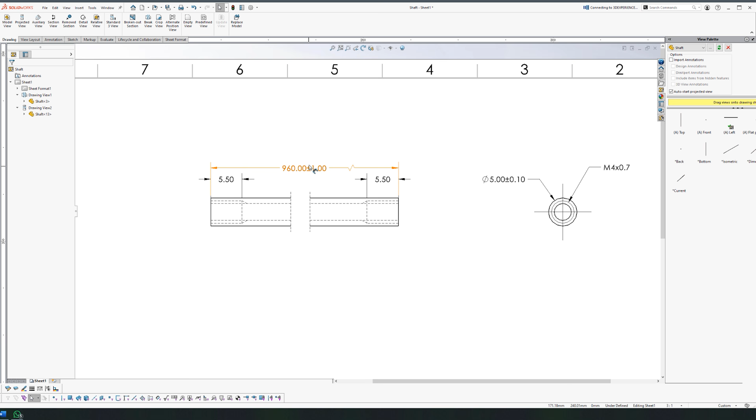Now I'll bring another shaft at the same angle, just changing its configuration to address the extended version, just like the members where we did 3 of them in one drawing. Here we'll do 2 in one. Purposefully, I'll leave this a little longer so with the naked eye you can see the difference between the 2. I'll copy the tolerance format onto this dimension so I don't assign it twice. And if you recall, the extended version doesn't have any inner threads like the normal version. I'll write its name directly on the drawing so the difference is clear.

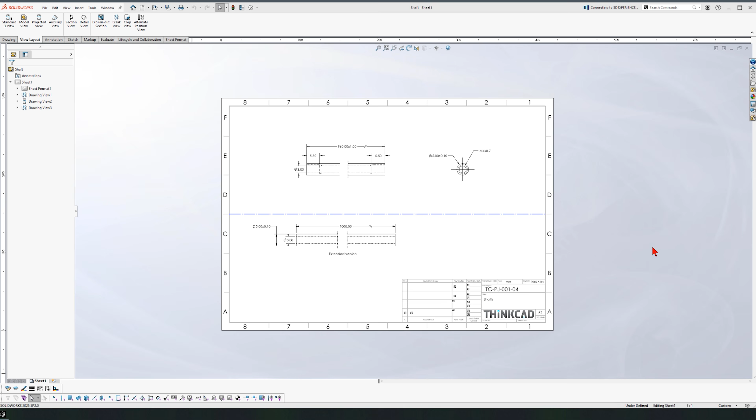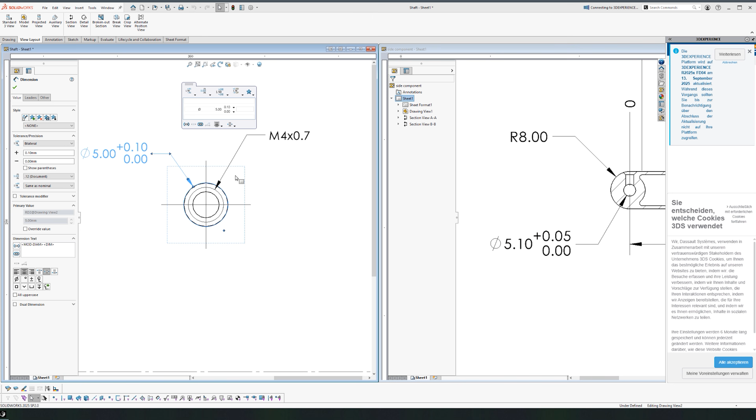Now, since this will fit inside the side component of the top rack sub-assembly, I'll open them side by side and check that the tolerances work in our favor. This is the shaft and this is the hole in the side component. The hole is 5.1 and can go up to 5.15. The shaft tolerances are between 5 and 5.10. So worst case, if the hole is 5.15 and the shaft is 5, the gap is too big. If both are 5.10, then it's tight.

But since the side component is plastic, even 5.10 and 5.10 will work with a little pressure, and a tighter fit is actually better. If both were metal, that would be risky and unwise. But since the shaft is metal and the side is plastic, this works fine.

Next, we have the cap 3. Assigning the dimensions again. Double check tolerances against the interior of the member. Open both drawings side by side, 12.75 against 6.4. I noticed I gave the tolerance to the wrong side. That was the length and it does not need tolerance. That was a mistake, so I'll remove it. Instead, this one needs the tolerance. It can be slightly smaller, but not larger. Same for this 6.40. Let's adjust the tolerance to 50 microns.

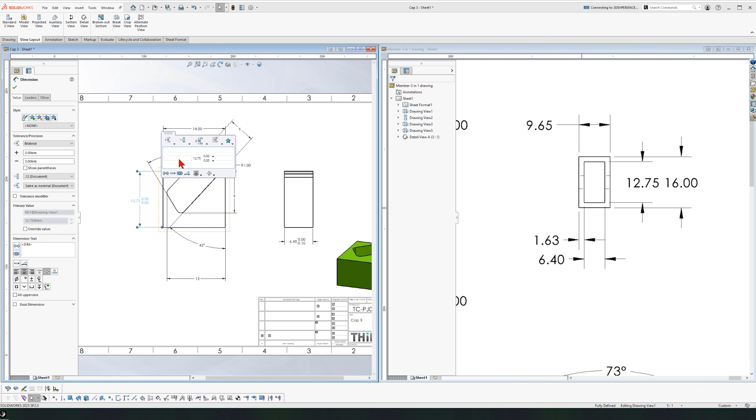Next, we have end cap number 1. Let's create a drawing for it. Again, we run this against the inner sides of the member, making sure tolerances are in our favor. Since it has to fit into a standard off-the-shelf component, the members, I won't remove decimals here. These are exceptions. We need them because we saved already on the members, and these components have to follow order.

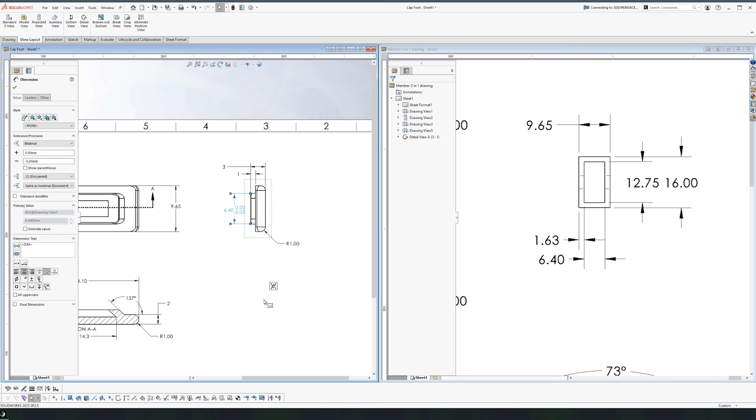And lastly, we have the last end cap that goes on the foot. Set the scale right, same concept, check against the inner size of the members, and assign tolerances properly. Again, decimals need to be so accurate. Now we add the top view and its dimensions. 6.40 is one of the dimensions that needs tolerancing. Again, check against the member to ensure the tolerance is on the correct dimension.

I noticed we don't have 12.75 here. This came up during cross-checking, so I'll add it. It would be from here to here. Now we can assign the last tolerance, and this drawing is ready for our colleagues to review.

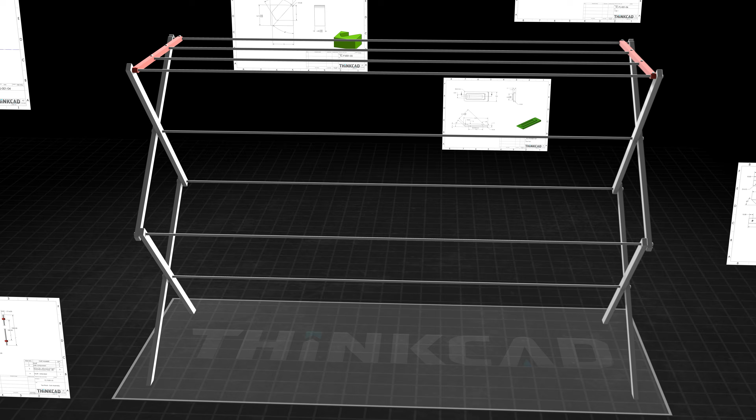So now we've got a full rack, parts designed, assembled, and even drawings made. You've seen how little details like how a shaft fits or how deep a thread goes change how realistic your design is. But this rack isn't ready for manufacturing yet. If we were to build it for real, we'd still add some things like washers at the end of the shafts. Maybe a better locking mechanism. That's just how engineering goes. Every time you peel one layer back, there is another one waiting. It's the same with SolidWorks. You might think you've got it until one small habit or shortcut destroys your model.